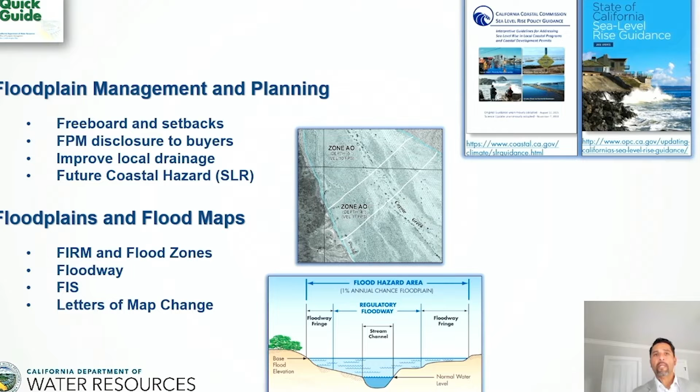We've heard that 25 to 30% of flood insurance claims are in areas outside the SFHA. We all know that floods don't stop at a particular line on a map. Therefore, before approving new development, the guide makes a pitch to communities to consider freeboard and consider incorporating open space and setbacks from the SFHA for future subdivisions, and to consider restricting the use of fill material as it could impact drainage and affect adjacent properties and the environment. It also makes a pitch to consider restricting development in the floodway. However, if allowed, make sure that a no-rise certification is submitted.

The guide also outlines the duties of the local administrator, like reviewing applications, reviewing plans, making sure that the lowest floor elevation is above the BFE, ensuring that all other state and federal permits are obtained, and issuing or denying permits.

The guide has a section that introduces the FEMA elevation certificate and when to use it. First, the EC is used for compliance, to make sure that the lowest floor elevation meets the minimum CFR requirements, building codes, and community's floodplain management ordinance. Second, the EC is currently used to rate flood insurance policies. However, it will no longer be required to rate policies under Risk Rating 2.0.

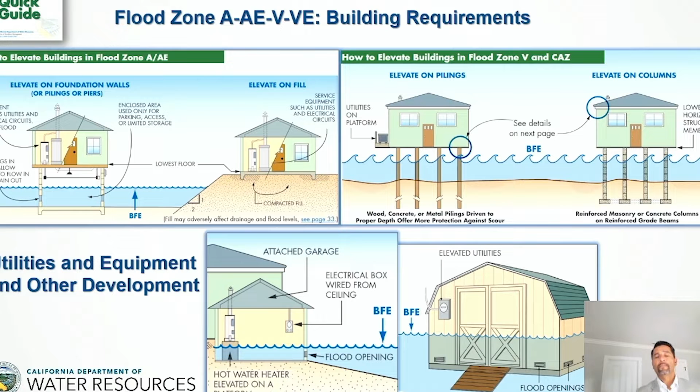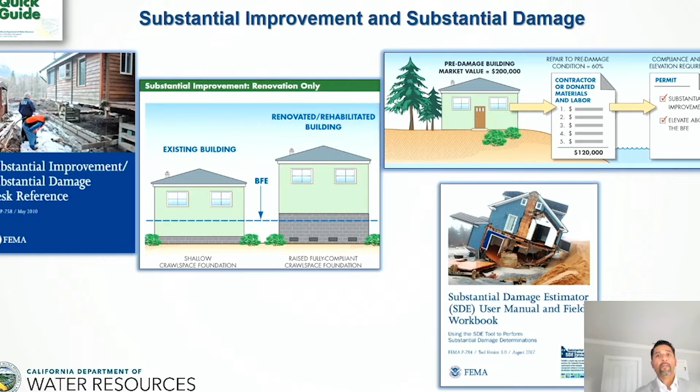This document also describes substantial improvement and substantial damage, and briefly describes how to calculate the cost of improvements and the market value of the structure. The guide also talks about the Substantial Damage Estimator, which can be used to assess flood, wind, wildfire, seismic, and other forms of damage. The estimator provides timely determinations so that reconstruction can begin following disasters.

The quick guide provides some ideas to mitigate the risk of flooding, such as building flood walls and berms, or taking more aggressive mitigation measures like addressing repetitive loss properties through acquisitions. For large-scale mitigation projects, we provide a link to the Governor's Office of Emergency Services, which administers the Hazard Mitigation Grant Program in California.

Next, we introduce the Central Valley Flood Protection Board, which is a regulatory agency responsible for issuing encroachment permits in the Sacramento and San Joaquin River basins. They enforce higher regulatory standards for new development, such as setbacks from floodways and urban levee design to withstand the 0.5% annual chance probability.

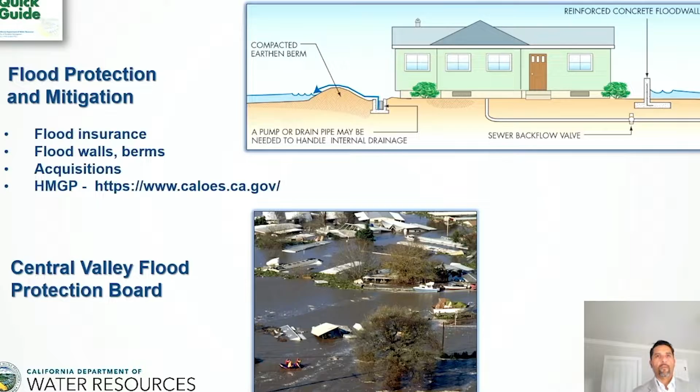As far as safety and preparedness, our Division of Safety of Dams provides oversight of the design, construction, and maintenance of over 1,200 dams. Our Division of Flood Management is responsible for roughly 1,600 miles of levees in the Central Valley, and our Flood Operations Center manages the state's flood emergency response and all local requests for technical and emergency assistance from the Army Corps of Engineers.

If you've been following the water news lately about the Southwest, you probably know about our drought conditions, not only affecting our water supply, but also increasing our risk of wildfires. Having burned watersheds before any rainy event is a recipe for disaster, like the one we experienced in Santa Barbara County a few years ago. The Thomas Fire, which started on December 4, 2017, burned nearly 282,000 acres. A month later, on January 9, 2018, a storm brought a significant amount of runoff above the city of Montecito, where 23 people died and dozens of homes were destroyed by the debris and mud flow.

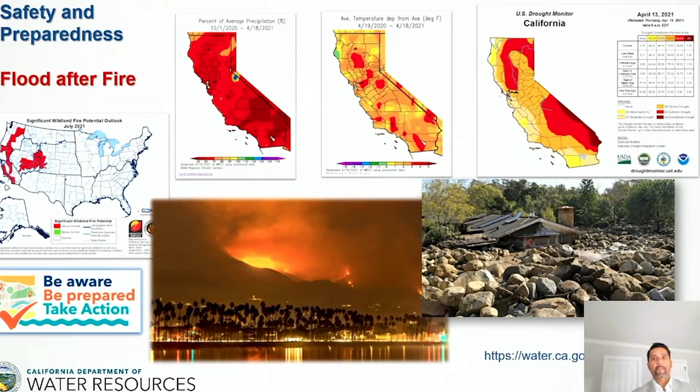Our office maintains situational awareness year-round for disasters. However, pre-disaster mitigation for flood after fire events is necessary and will definitely require the continued support from our federal partners. Finally, we provide a list of resources if people need more information about the NFIP.

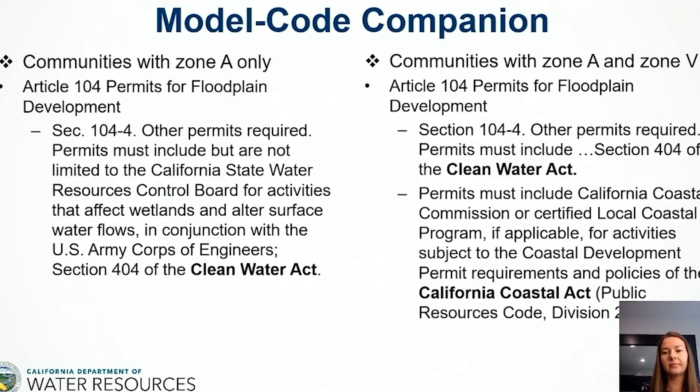We also have resources for communities to adopt higher standards. There are currently 15 higher standards for floodplain management, and a few of them include freeboard, repetitive losses, flood hazard maps other than the FIRM, and a benefit to adopting higher standards is that it may enable a community to qualify for CRS points, and it may reduce your flood risk and insurance premiums.

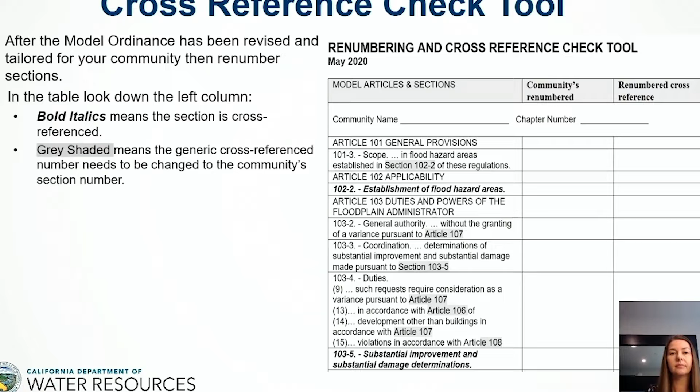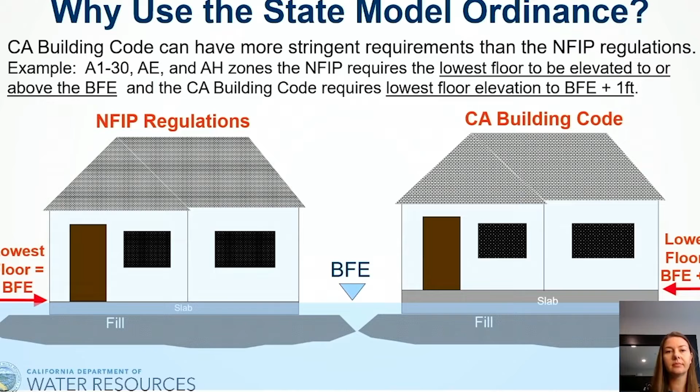The state model ordinance also meets the NFIP requirements and is coordinated with the California Building Code, and this will help the communities ensure they are following both federal and state regulations and reduce the risk of buildings in flood hazard areas. Another reason is they were developed by California DWR and they're approved by FEMA. And finally, California communities are required to adopt California building standards within 180 days after being published.

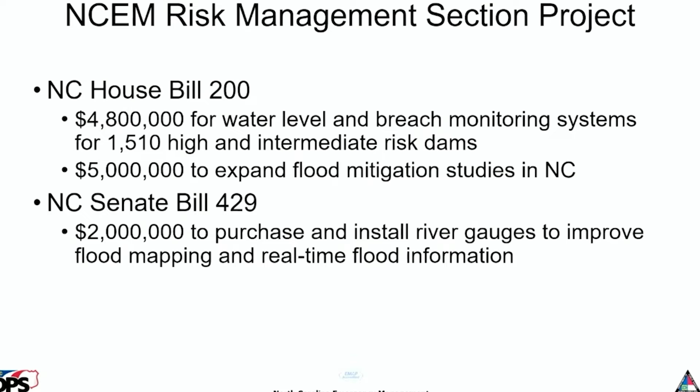After Hurricane Florence in North Carolina, the state legislature provided NCEM approximately $12 million to perform 3 major projects, including $4.8 million for developing a dam alert and monitoring system for intermediate and high hazard dams, $5 million to perform flood mitigation studies for all areas that we currently do not have flood studies, and $2 million to purchase and install new riverine and coastal water level gauges to support our flood inundation mapping and alert network system, or our FIMAN application.

North Carolina Dam Safety completed rainfall runoff modeling of approximately 268 dams in the Neuse River Basin, which determined the amount of rainfall in a watershed required to activate auxiliary spillways, overtop and potentially cause a dam to fail.

This information will be integrated into a dam emergency and alert monitoring system, which will provide emergency alerts to North Carolina Dam Safety first responders and dam owners when forecasted or observed rainfall at a dam or in a watershed reach critical water levels identified by the rainfall runoff model for an individual dam.

North Carolina Emergency Management has recently completed rainfall runoff modeling to determine critical rainfall amounts to potentially overtop a dam for approximately 287 structures, shown here with the green triangles. The studies that Dam Safety completed originally in the Neuse Basin are shown with the black circles in this figure.

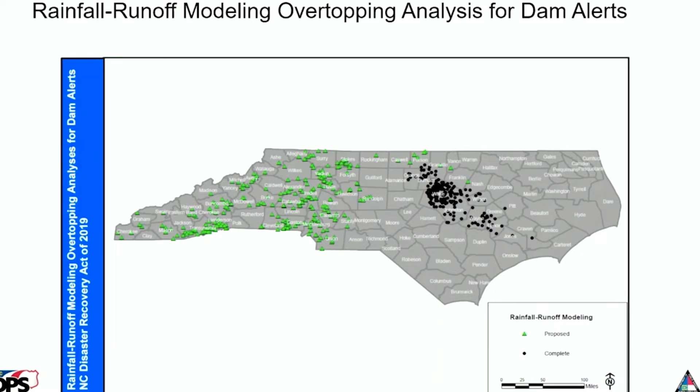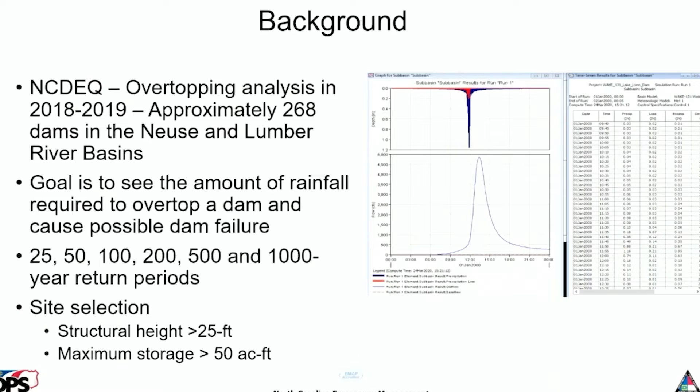6 design storms were modeled, including the 25, 50, 100, 200, 500, and 1,000-year storm events. Only dams with a structural height of greater than 25 feet and a maximum storage greater than 50 acre-feet were selected for this analysis.

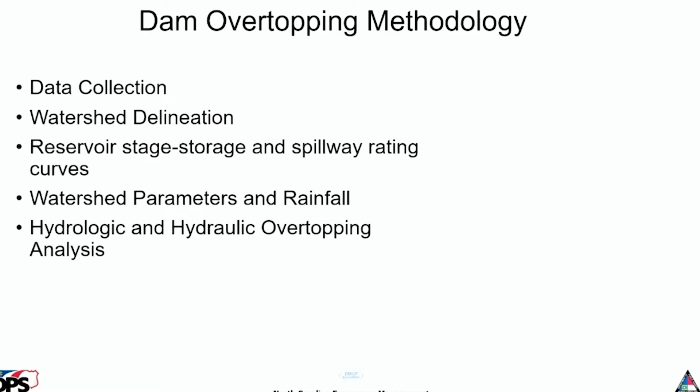To perform our overtopping analysis, we had to collect data for various locations, delineate watershed boundaries, develop stage storage and spillway rating curves, determine watershed parameters and design rainfall amounts, and put all data in our internal rainfall runoff model for a dam.

Data collected include as-built information from Dam Safety to obtain spillway, dam crest, and outlet information. Where as-built data was unavailable, this information was obtained through field survey. The latest National Land Cover Data Set was used for land use determination, and the NRCS Soil Survey Geographic Database was used for soil types for curve number infiltration calculations.

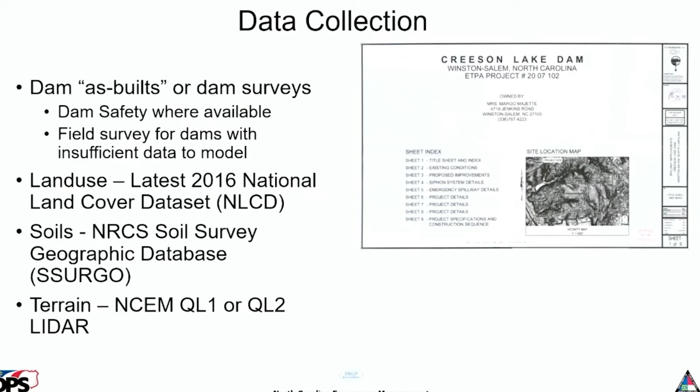We used the latest NCEM Quality Level 1 or QL1 or 2 LiDAR terrain data for developing stage storage curves and watershed boundaries depending upon location within the state. Watershed boundaries were delineated using a 3-foot or 10-foot digital elevation model developed from our LiDAR data and using the GIS ArcHydro software. The watershed boundary was delineated from the outlet at the downstream face of the dam, as shown in the figure at the bottom left here.

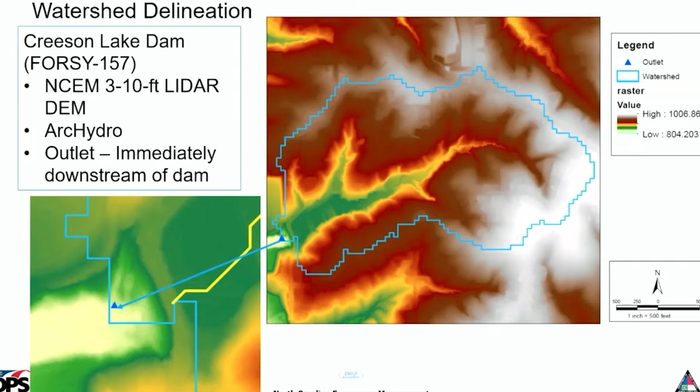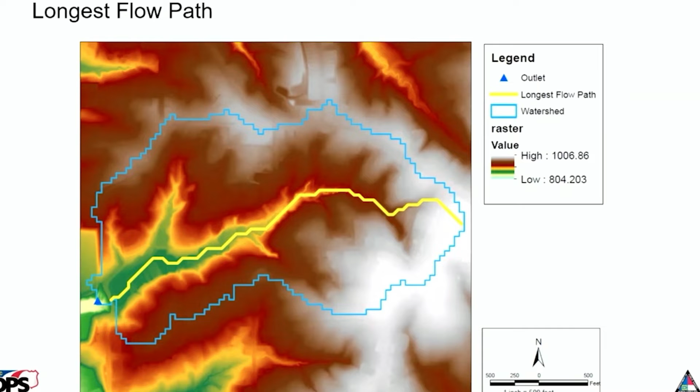Next, we delineated the longest flow path for the watershed using ArcHydro or other automated tools. Shown here in yellow, the longest flow path was used for lag time calculations for our hydrology calculations. ArcHydro again was used to develop stage storage curves for the tributary watershed for our dams, starting at the normal pool elevation at half-foot increments.

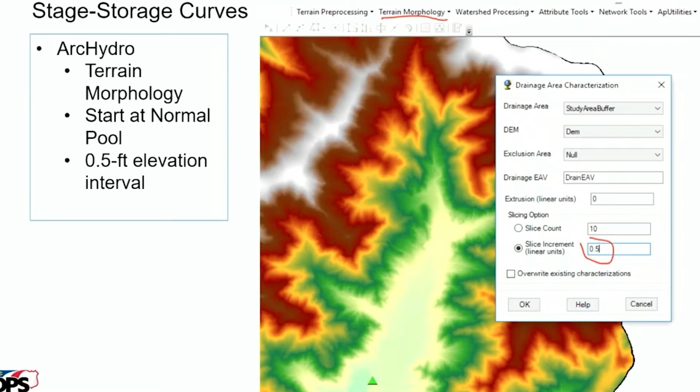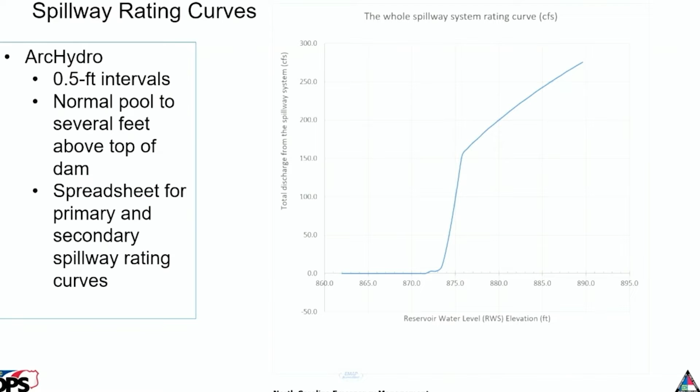Spillway rating curves were then developed from as-built drawings or dam survey information at half-foot increments, starting from the normal pool water level at the dam. A standardized spreadsheet was created by our consultants to assist with developing rating curves for the primary and secondary spillways. An example is shown here in the figure on the right of one of our spillway rating curves for this dam we are reviewing today in Forsyth County.

Watershed parameters for the rainfall runoff model were then determined. The SCS watershed lag time method was used to calculate the basin lag time from the longest flow path. The SCS curve number method was used for infiltration losses for all models, and NOAA Atlas 14 was used for the design storm rainfall amounts.

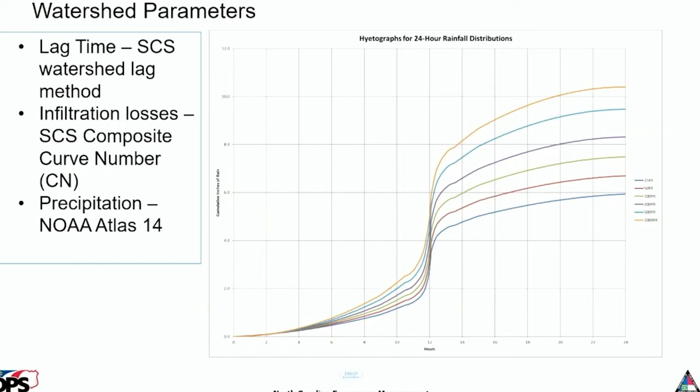Finally, a single watershed and reservoir rainfall runoff model was created in the U.S. Army Corps of Engineers HEC-HMS model, and all of the previously described input data was entered into our model. The SCS curve number method was used for model losses, and hydrographs were developed in HEC-HMS using the SCS unit hydrograph method and lag time calculations.

The model assumed no base flow, and an SCS type 2 or 3 storm distribution was used depending upon where you were in the state of North Carolina, since 2 curves cover the state. Models were run for a minimum of 24 hours or longer for larger watersheds.

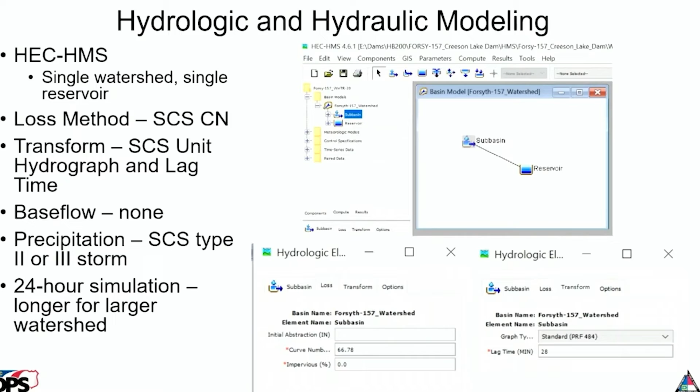Here are the results of the overtopping analysis for the Creeson Lake Dam, which did not overtop during a 1,000-year event. If you look at the figure to the right, the top of the dam elevation is shown in red, and the rainfall amount, or the storm frequency versus the elevation, can be seen in the blue line. As you can see, the 1,000-year event got within 1 foot of overtopping this dam, but did not actually overtop the dam.

So for these dams where the 1,000-year storm event didn't overtop the dam, to determine when the dam would overtop, we're developing a Python script internally to perform that task. Basically, we're going to extrapolate the blue curve to try and determine the rainfall amount that'll overtop the actual dam itself.

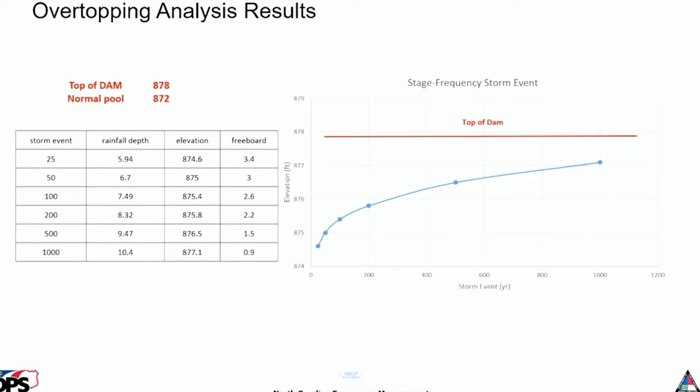And earlier this year, we purchased the DamWatch application from U.S. Engineering for our dam alert and monitoring project. This application is a cloud-based application that allows us to develop custom alerts for individual dams based on forecast and actual rainfall amounts and our rainfall runoff modeling or real-time water level data from our low-cost sensors.

Alerts will be triggered and provided to NCDEQ dam safety staff when water levels predicted by the HEC-HMS model and rainfall amounts or the gauge water level are within 1 foot of overtopping the dam. This criteria is consistent with the majority of emergency action plans currently implemented in the state of North Carolina.

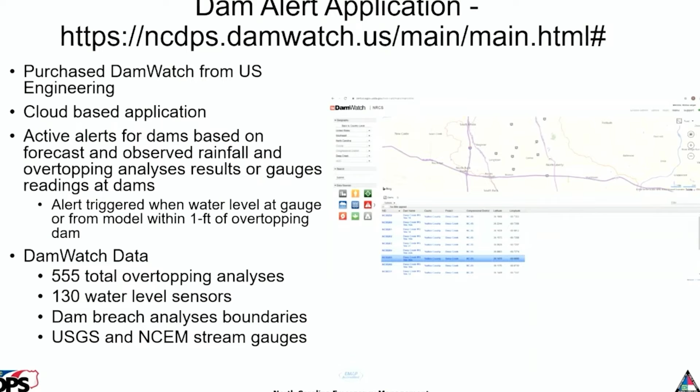By the end of 2021, we will actively monitor 555 dams with our rainfall runoff models and forecast or actual rainfall amounts provided by NOAA. And also 130 dams will be monitored using real-time water level data from our low-cost sensors. Additionally, we will be loading overtopping failure breach analysis boundaries and data, and the system will also have current NCEM and USGS water level gauge data in the system.

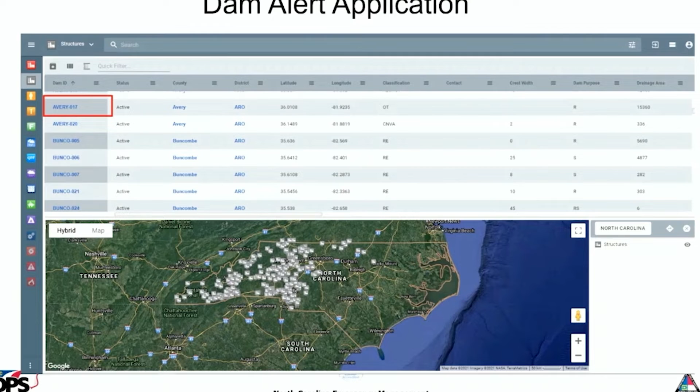The DamWatch application is a secure application with access managed by North Carolina Emergency Management and NCDEQ. After you log in to the North Carolina application, you will see the following screen. If you click on the structure icon, as shown here, you'll see all of the dams in the state of North Carolina that are in our system. And if you click on one of those structures, dams with rainfall runoff models will have the watershed boundary displayed when a dam is selected within the application.

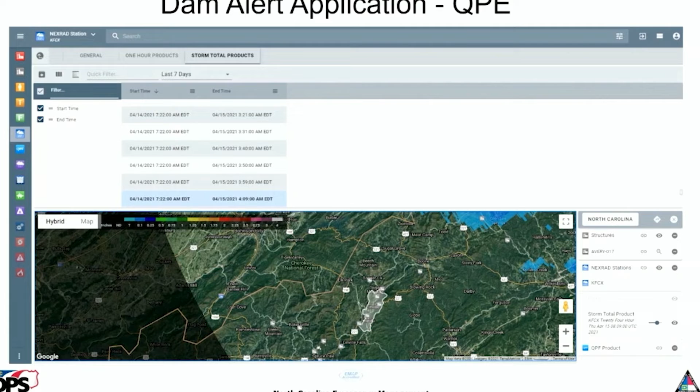Alerts are generated using the NOAA quantitative precipitation forecast or quantitative precipitation estimate data, and this is called QPF or QPE information. So if you click on the rainfall icon, you can obtain the current quantitative precipitation estimates in the vicinity of your watershed. The figure below shows the 7-day rainfall totals in the vicinity of this dam. And as you can see, not much rainfall has occurred in the past 7 days.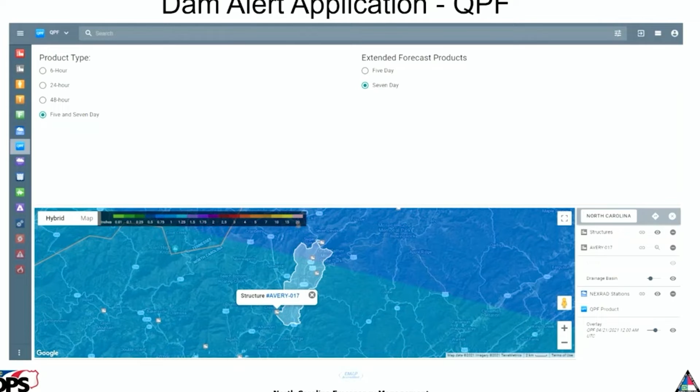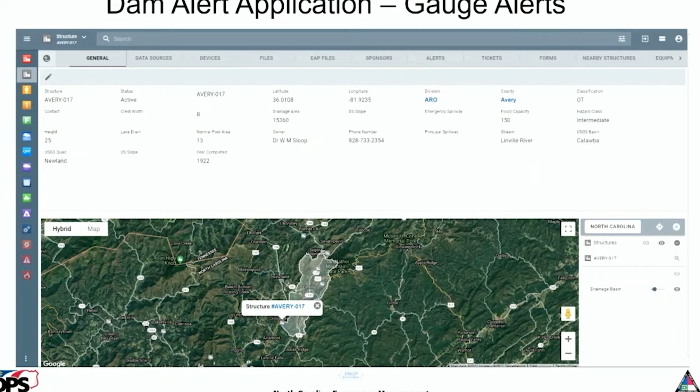Finally, you also have the ability to see real-time water level data for USGS and NCEM gauges, and you can see that by clicking on the following icon. This display here shows water level data for the last 30 days for a gauge near the dam we were just looking at earlier.

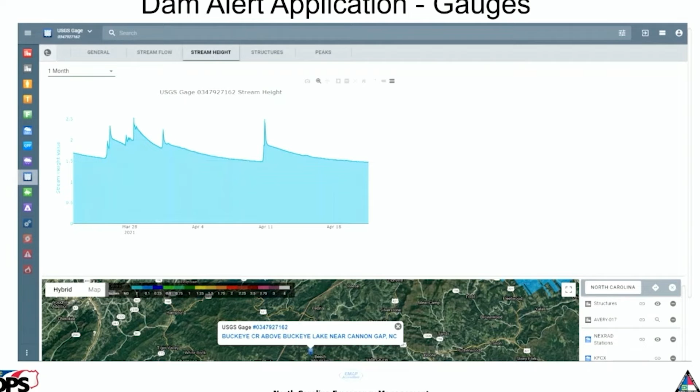And that's it for an overview of our dam alert and monitoring system. So now I'm going to hand things over to Gary Thompson to describe what we're going to be doing, the types of low-cost sensors we're going to be using, and where we are actually going to be doing monitoring using these low-cost sensors.

My name is Gary Thompson. I'm with North Carolina Emergency Management. I'm the Deputy Risk Management Chief and Chief of the North Carolina Geodetic Survey. I would like to provide you information about the water level gauge phase of the project. We plan to install water level gauges at state or locally owned dam sites that are either high or intermediate hazard sites. And you can see from the image here, the sites where we plan to install water level gauges are marked with a green triangle.

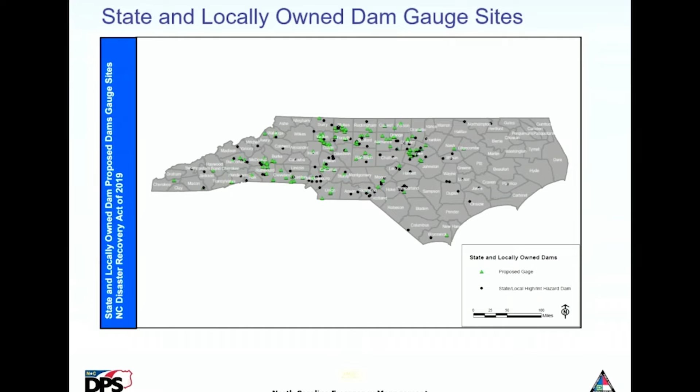Before I provide detailed information about the project, I'd like to provide you information about some of the work that we did on previous projects that inform this project. We previously worked on a project with the Department of Homeland Security, the Internet of Things Low-Cost Flood Inundation Sensor Project. The purpose of this project was to develop low-cost gauges that could be utilized by local governments, state agencies, federal agencies, and the private sector to monitor water levels in streams, rivers, and other water bodies.

This project involved installing gauges at different sites across North Carolina. We've received a total of 75 gauges, 25 from each vendor. We decided that at each one of our sites we would install a sensor from each of the companies so that they would have equal comparison. We'll all have the same conditions as we operate the sensors.

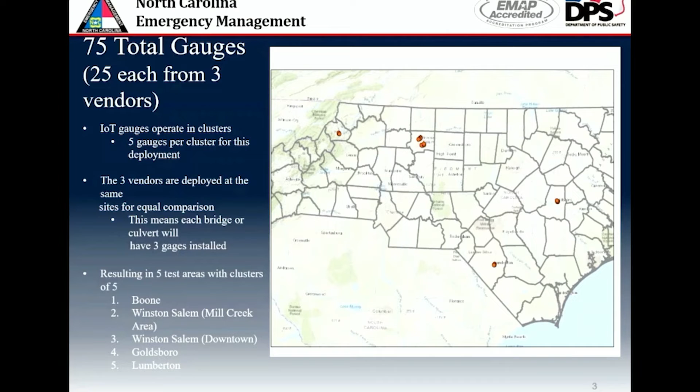The Department of Homeland Security test project led us to North Carolina A&T State University, the Geomatics program, to develop our own test site. At our test site at North Carolina A&T State University, we were able to test additional gauges. So you can see here from the pictures some of the gauges that we're currently testing.

The project was funded by the University of North Carolina Chapel Hill, the North Carolina Policy Collaboratory, and we're currently taking part in what we call Phase 3 of the Department of Homeland Security Low-Cost Gauge Project. We're currently operating 3 pre-production units, and they're actually part of our flood inundation map and alert network. Both the Department of Homeland Security project and our test site provide us very valuable information to support the current project we're working on to install gauges at different locations across the state.

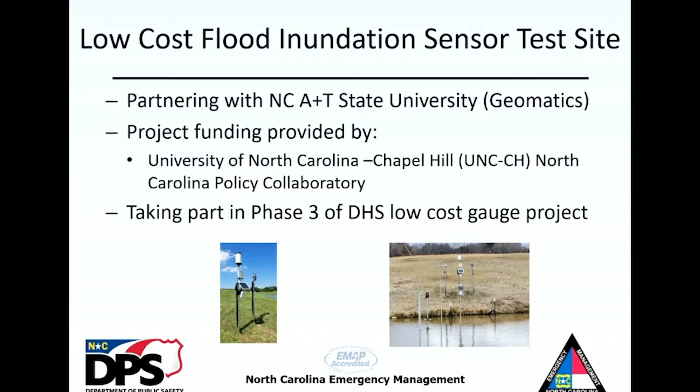So as for our project timeline, we currently are working through all these different points in our timeline. The first step was to identify the locations where to install the water level gauges. We used a variety of our data sets, our statewide LiDAR elevation data, our imagery. We worked with local emergency management officials and other local officials to determine the locations to install the water level gauges. And then once we determined the locations, we determined what type of sensor we would use at each location.

Was a site suitable for an ultrasonic sensor, or do we need to install a pressure sensor? Sites where we could install the sensor at an elevation that was higher than the overtopping elevation, such as a bridge or a walkway that had a clear line of sight view down to the water surface, we plan to install ultrasonic sensors. The other remaining sites will be installing pressure sensors.

Once we determined the locations and what type of sensor, we prepared data for our field staff to do a site visit. The purpose of the site visit was to determine if our proposed location was the proper location. In some cases, after consulting with the landowner, it was determined that we needed to move the gauge location to be in a safer location, and also in case of overtopping, it had a better chance of surviving and continuing to provide us information. Once we had completed the site visits, we worked with the landowner to obtain approval to install a gauge.

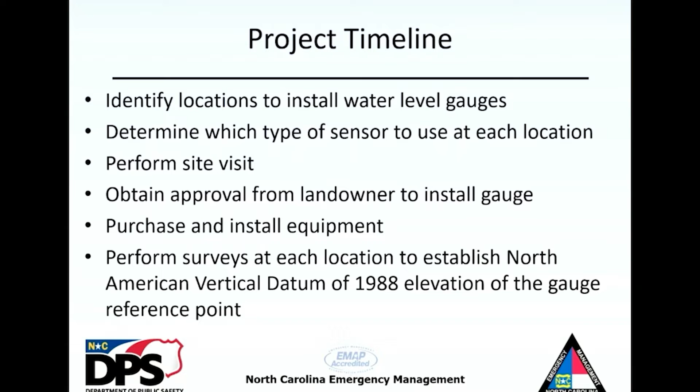We're currently finalizing the purchase of the equipment and plan to start installation within the next 2 months. Once all the installation has been completed, we will perform surveys at each location to establish the North American Vertical Datum 1988 elevation of each of the gauge reference points. As I mentioned, to support this project, we have a lot of data here in North Carolina that will support this project and other projects.

One is our statewide LiDAR elevation data set. Here in North Carolina, we have collected statewide LiDAR elevation twice. First was from 2001 to 2005, and then a refresh was done in 2014 to 2017. And now we're currently starting our third iteration. In 2020, the United States Geological Survey collected quality level 1 LiDAR elevation data in phases 1 and 2. And also for the first time, topobathy LiDAR elevation data was collected along the entire coast by NOAA.

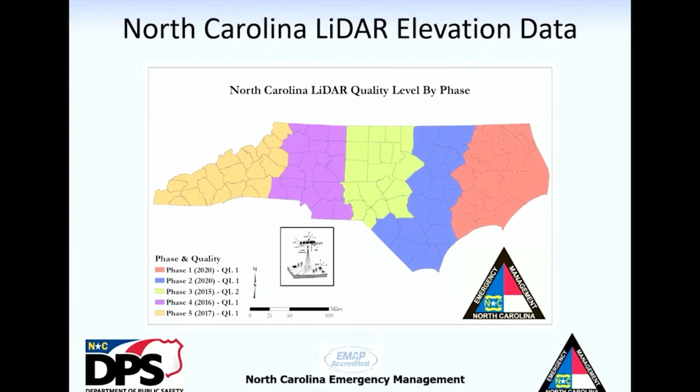So this is a very valuable data set that we'll be using for this project, but also other projects, like our floodplain mapping program. And it's also used by other state agencies, federal agencies, and the private sector. The other project is our statewide imagery project. This project is funded by the North Carolina Wireless 911 Board.

Imagery is collected for approximately a quarter of the state each year. You can see that in 2021, the data was collected in the eastern Piedmont, and in early 2022, the northern Piedmont and Mountains area imagery will be collected.

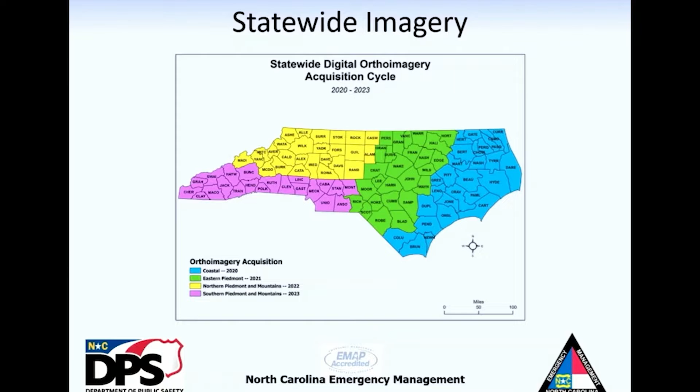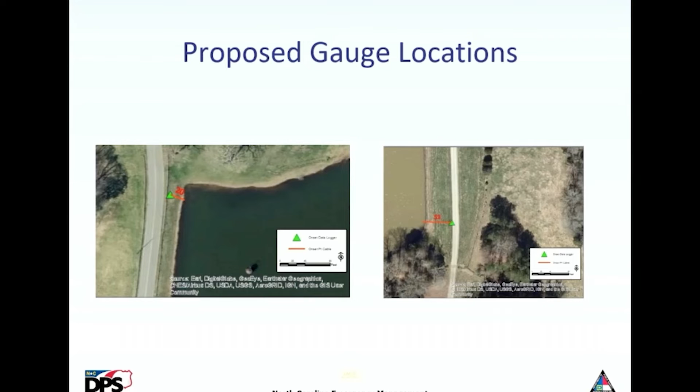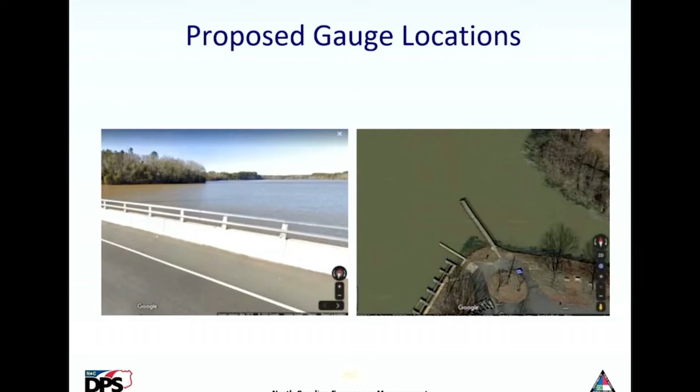These pictures are proposed sites where we plan to install ultrasonic sensors. You can see the one on the left is a bridge where we install the sensor on the railing, and then the picture on the right is a walkway at a lake where we will install the sensor.

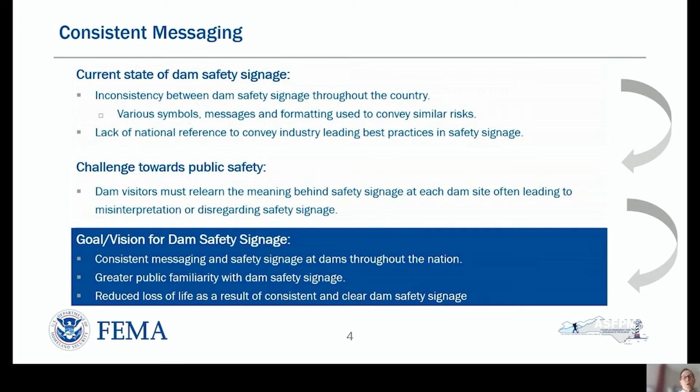As the public becomes more familiar with safety signage, this typically leads to increased adherence to the safety elements they identify. Think of highway signs. Even if a sign is obscured for some reason, drivers know that a triangle-shaped sign at an intersection is a yield sign, and an octagon is a stop sign. Beyond the colors and words, the shape helps the public maintain awareness and act appropriately.

Identifying and evaluating the types of risks found at dam facilities is another pillar to ensure all visitors are warned against these risks. We reviewed guidance published by the Canadian Dam Association related to risk evaluation. Risks should be evaluated based on frequency, severity, the location of the risk, whether it's upstream or downstream, as well as the amount of access the public has to the risky area.

Only those warning against the potential to cause serious injury or death should be identified as a danger sign, while those warning against the potential to cause minor injury should be identified with a warning sign. Areas with little potential for causing injury, but which would benefit from additional signage, should utilize information and educational signage. So once we evaluate and categorize the risks, then we should look at the specific components. Diana Castro is going to take us through various structures in a dam.

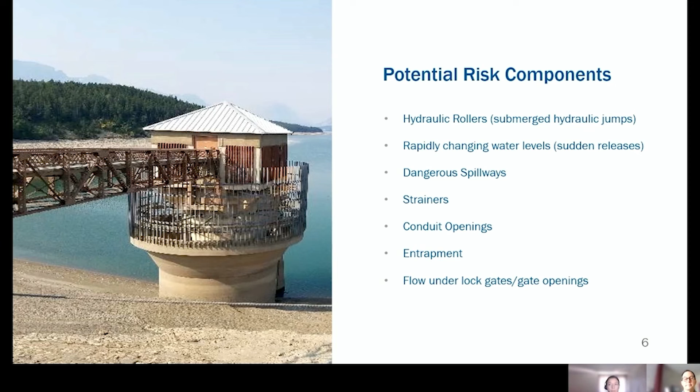So when we started to research effective communication, we found research on the psychology of warnings. Mark Green's research paper entitled The Psychology of Signage describes various factors that decrease the likelihood of an individual responding to a warning sign. And these factors include familiarization with the area, the appearance of the warning, the human response gap, denial that risk could happen to them, and dilution or pollution of signage, where you just have too much signage and people can't focus on those signs that are most important to their safety.

So safety signage is much more complicated than just warning the public of a risk, and we need to consider the human elements in how people interact with, interpret, and react to signage. By identifying these elements and finding unique ways to mitigate the hurdles, we can improve communication with the public and encourage behavioral change from people visiting a dam.

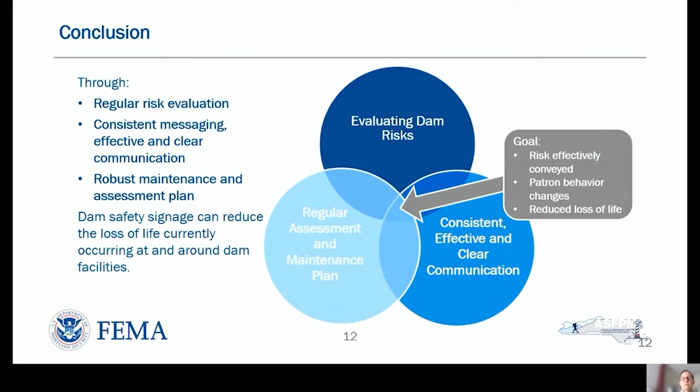In conclusion, proper dam safety signage can reduce the risk and potentially the loss of life occurring as a result of dam-related hazards. Our goal is to elevate dam safety practices on a national level to the point where risks are effectively and strategically conveyed to patrons. Through thorough dam risk evaluations, consistent, effective, and clear communication practices, and a regular sign assessment and maintenance program, dams can help change patrons' risky behaviors.